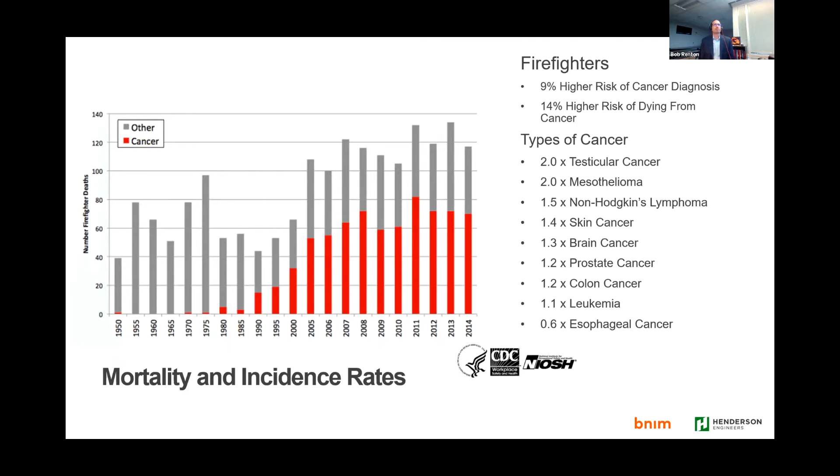So that's kind of the research we undertook, first from a theoretical, and then we went into some live burns and built different wall sections from different years, and we'll get into that in the details further.

Jeremy. Yeah, so part of what we were looking at is what are the decisions that are in front of us as an architect and an engineer every day? What are the things that we could start to look at and point to in our specifications and the way that we go about the design work that we do that could start to solve this? And so obviously the place to begin is in some of the fire code. So looking at ASTM testing, look at NFPA testing.

Both of these offer a part of the solution, but neither of them tells us anything about what happens once a building is involved in fire, and the chemical changes that happen, not just how much smoke is developed, but what is the chemistry of that smoke that both first responders running into a building are exposed to, as well as families and individuals escaping from a building are exposed to on their way out. So what we identified was that there really wasn't a test that looked at this sort of gray zone between these two.

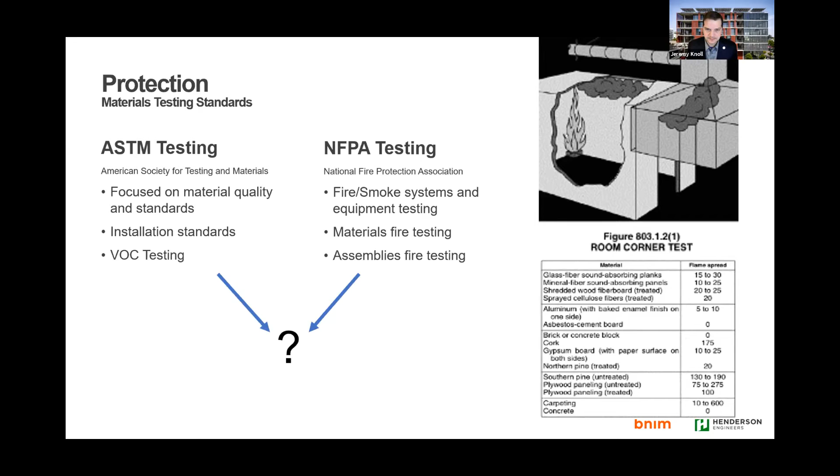And so we developed what we referred to as our Designed to Burn 1.0, which was essentially facilitating cross-industry conversations where it was an engineer, architect, firefighters, and others in the industry all talking about, like the elephant and the blind man, what's the part that each of us can see and understand, what's the part that we're touching, and how can we describe it to each other until we get a more complete picture of it.

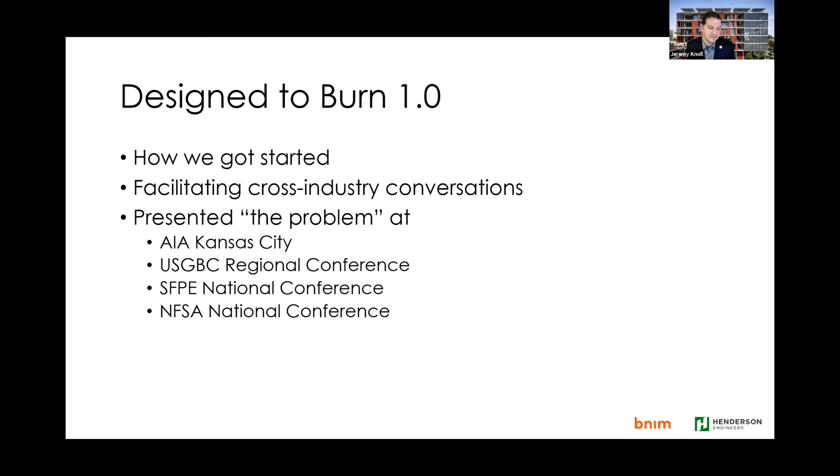And then we went about presenting essentially this problem statement to these different regional and national conferences, trying to really gather information from others about this question. What are the choices that we make every day that could impact this result of cancer incidents in first responders?

So continuing that research, the next set of questions was, well, what do the sustainability experts tell us about this? We've got all kinds of certifications out there. These are just 3 of them that seem like they should tell us quite a bit about how to deal with toxicity in the built environment and in the building envelope.

And so LEED certification gives us about 4 different credits dealing with material toxicity primarily, both in preventing toxic chemicals coming in with the building materials themselves, as well as protecting the building from new sources of pollutants like oils on the bottom of your shoes coming in from parking lots and so forth. WELL certification has several different credits or measures that could be associated with this. Similarly, reducing toxins in the basic building materials.

And then a couple that actually talk about wayfinding, because one of the things we learned from talking with firefighters is as you enter a building, if it's not a space you're familiar with, having really clear wayfinding means that you can get to where you're trying to go within the building more quickly. So there is some guidance within the WELL certification about how to set up a space that gives some logical wayfinding information.

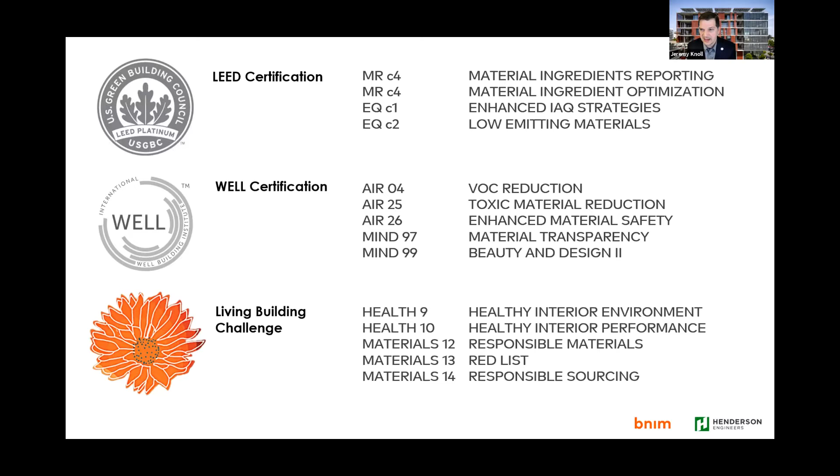And then finally, the Living Building Challenge talks again about preventing those toxic chemicals from coming into the building in the first place, and sourcing those materials in a way that is going to benefit not just the people in the building, but the people down the supply chain.

But if we look at all of these combined, what they're really doing well is they're dealing with exposure to people in the material supply chain, exposure of chemicals to people during construction, and then exposure during occupancy of the building. But none of these really address or even begin to talk about what happens in an emergency, how the building changes during that moment.

And I've worked on a number of K through 12 schools, and this was something that became pretty important, as one I completed a few years ago here had an electrical fire in a vault outside of the school on city property, but it dumped a bunch of smoke into the building. And so it was the better part of a week before they were able to safely reoccupy that space, using all kinds of filtration and air testing before they could get back in.

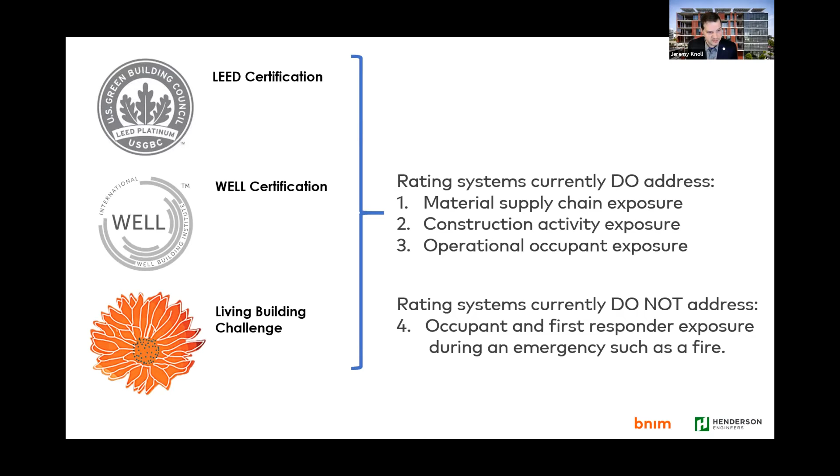So it's not just about protecting people while the building is in operation, but thinking about what happens in an emergency like that and how do we continue to protect people. So another thing that the Living Building Challenge gave us, as I'm sure many of you know, is the concept, or at least an industry standard, for what we call the red list, or the list of chemicals that are known to have harmful effects on both human physiology as well as the ecology in the spaces around us.

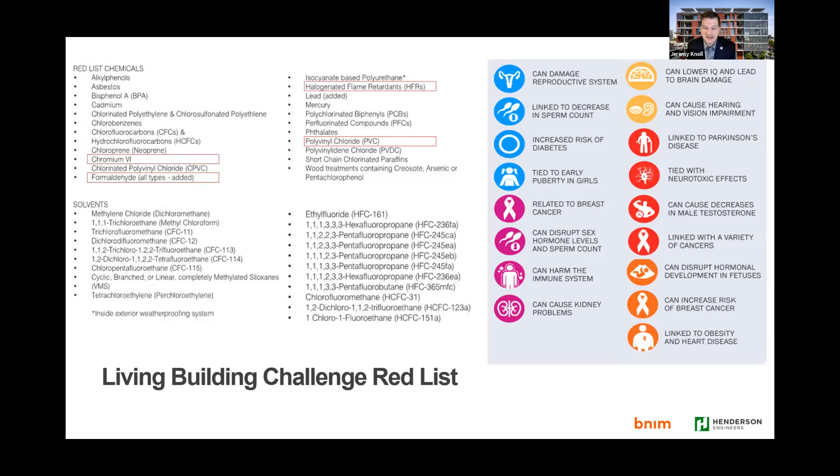We highlighted 4 chemicals in particular here at the top that are especially difficult to remove from buildings: chromium-6, formaldehyde, halogenated flame retardants, and polyvinyl chloride, or PVC. And on the right, you can see just some of the impacts of incorporating these chemicals into our buildings. And this seems like an easy thing to say, okay, we're just not going to use red list chemicals. But when you start to look at even just the building products and the furnishings that we put into our homes, we find these chemicals really everywhere.

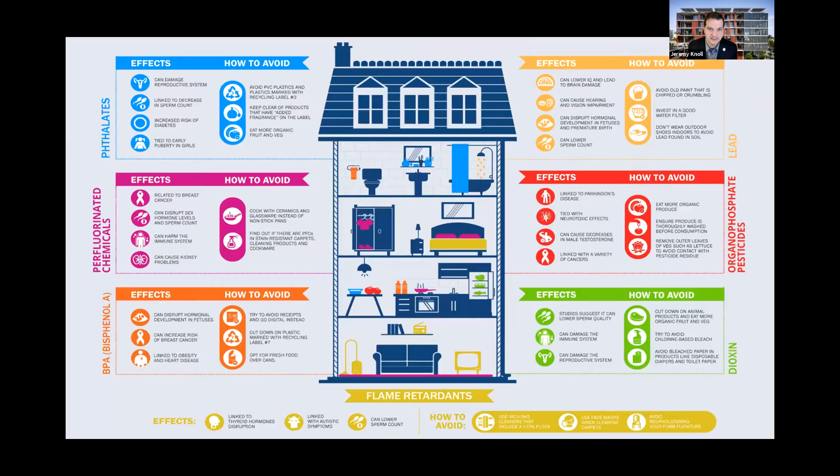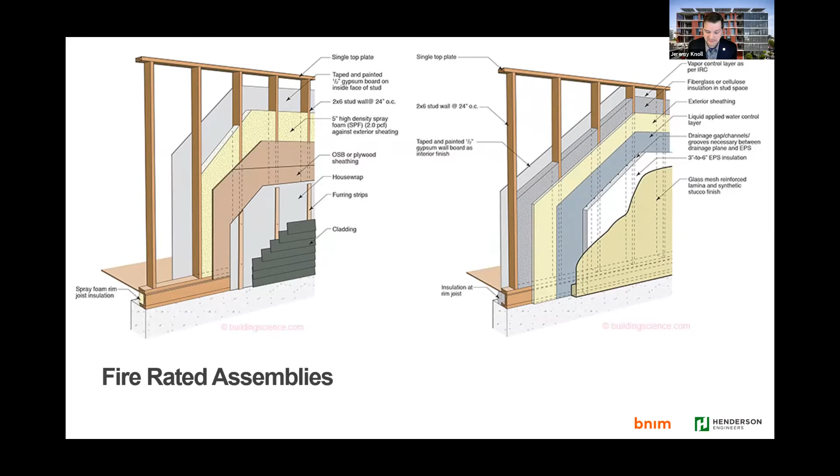So what are the steps that we can start to take now to understand what we can do about these different outcomes, and how can we prevent them from coming into the building? And so, as Bob mentioned, this is where we started thinking about the idea that maybe there's some fundamental parts and pieces to the way that we're building our buildings that could change, and what are the decisions that we could make about how we go about designing something like the exterior wall section that could begin to both give us some protection, but also passively remove these chemicals and materials that we know might chemically combine during a fire to create a toxic substance that doesn't exist in their inert form.

So that led us to many discussions. We spoke in different parts of the country and at different conferences, and it got us to more discussions with UL, with Factory Mutual, with USGBC, firefighters, lots of cancer research institutes and resources out there. And we realized that we needed to go for some applied research and to be able to test our theories and see if we could find some correlations.

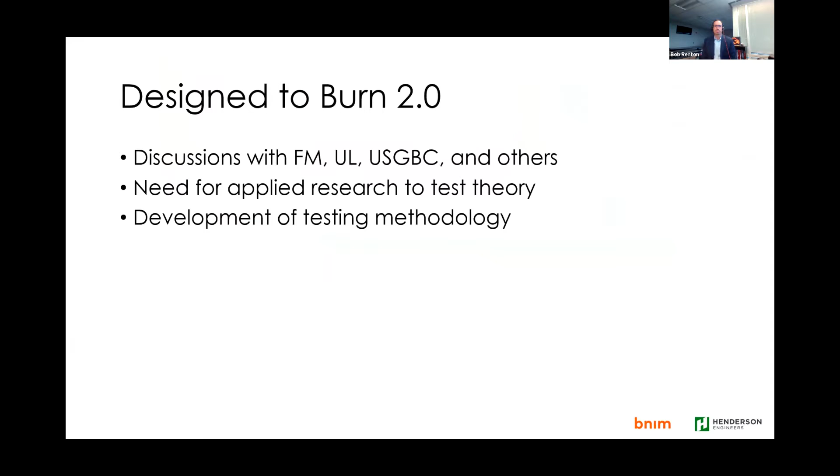So we decided that the best way to do that would be to build wall assemblies, or compartments at the time. So we ended up trying to wrap our heads around what we could do, and we looked for calorimetry, and we ended up at Oklahoma State University. We knew that we could get some use of a calorimeter there. So then we essentially put together a team.

Henderson Engineers sponsored research with Oklahoma State University, and BNIM and Jeremy and Armstrong Forensic Labs, and then Turner Construction. We all came together and put our heads together, and we knew what we needed to do as far as the different decades of construction, legacy through modern, and we tried to micro analyze what we could.

There's so many things to examine, so many things to look at. So we boiled it down to, we wanted to look at heat release rate and some fire dynamics, but we also wanted to get a lot of products of combustion and be able to analyze what's coming out of these different wall components. So we ended up, like I said, we sponsored a capstone project with the seniors at Oklahoma State University and their fire protection and safety engineering technology program.

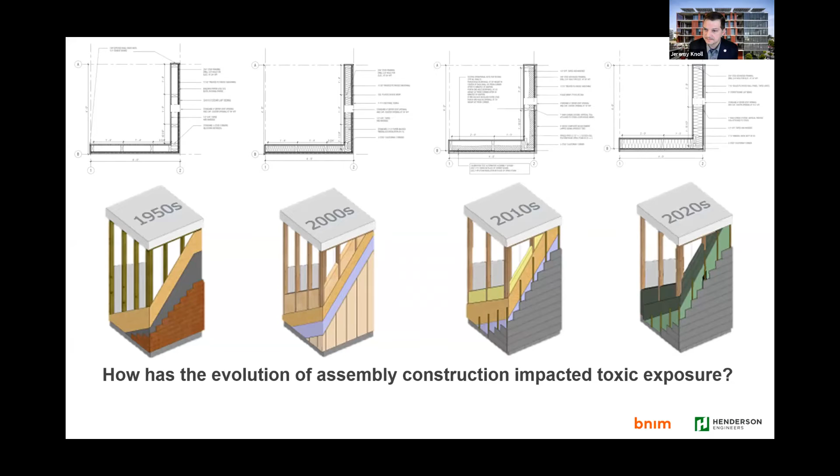So we weren't talking about a big change in cost or assembly, but something that could potentially, within reason, become a more standard building material type. And so then we worked with Turner Construction on actually building these wall corners. Initially, the students were going to build it, and Bob and I both shut that down pretty quickly.

These were students who had no real construction background, and we knew that we would get inconsistent assembly details and work. So we wanted a professional who builds homes over different time periods to do this for us. So they built it in a warehouse as a training exercise for some of their guys and gals, and then these were shipped down to the burn lab in Oklahoma.

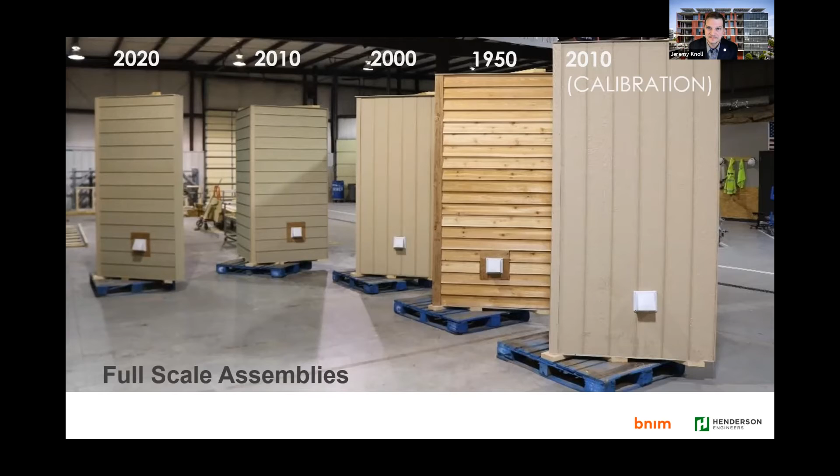And we kept pretty exacting details on how they were constructed and the materials, because we sensed that we want to reproduce and be able to test on multiple different revolutions the same cells and the same products, obviously. So thank you, Jeremy.

So then it became an idea of what are we going to sample for? Like I said, we knew that fire dynamics and heat release rate and some mass loss would be pretty simple, but getting into the details of the acids and the polynuclear aromatic hydrocarbons, the heavy metals that would be produced, the SVOCs, VOCs. So this was a collegiate project, obviously, and our budget wasn't unlimited, and our burn cell and our calorimeter was such.

So we tried to maximize the most likely products that we would see in residential construction and fires, and what would be the most valuable for our study, and also what we could afford, because we could spend thousands and thousands of dollars analyzing the different components. So this chart breaks down the big components we were looking for and testing for, and then mostly the students, with some direction from Armstrong Labs, built the sample trains, and that's what you see there.

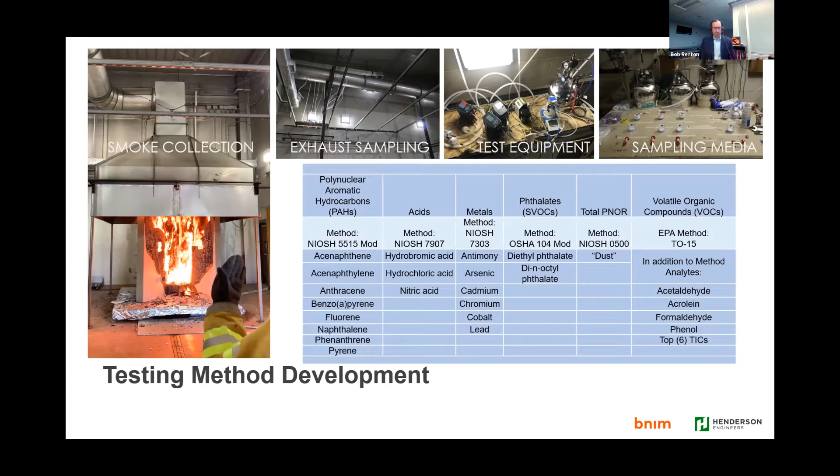We did 5 burns over 3 different sessions down in Stillwater, Oklahoma, and then sent the materials in 3 separate samples back to Armstrong, and tried to perfect along the way our testing and monitoring of the samples. So next slide. This was a collegiate effort and wasn't totally in the private sector, so there were some limitations, and we're aware of that, learning from those, and continually strive to do more testing. We recognize there's really no standard testing or sampling process for what we were looking for. So we put our heads together as a team and came up with what and how we were going to sample.

Limited resources as far as experience and equipment. The sample stream, this is the first time it had been done at Oklahoma State. So we had some issues with condensation and some heat up in our ductwork that diluted some of our samples a little bit. Stoichiometric ventilation in the fire. Obviously in a calorimeter, ventilation's pretty much unlimited. We realized that in a real room or compartment fire, you have incomplete combustion and limited ventilation, so you sometimes have more products of combustion, more smoke. It's not nearly as complete a combustion.

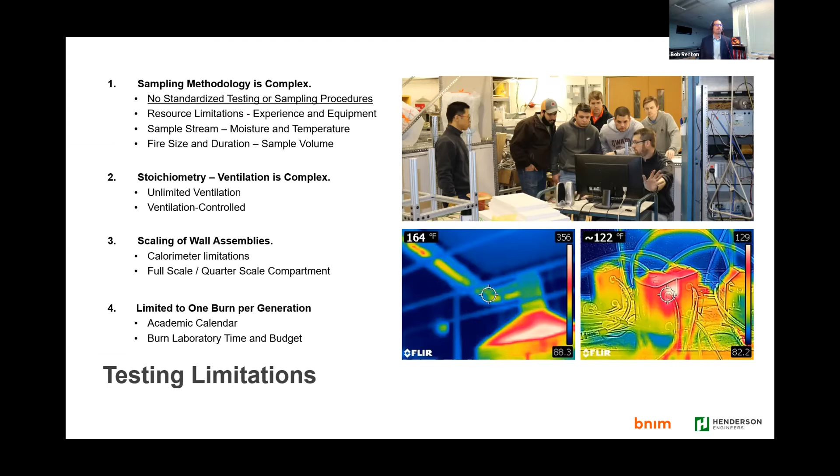We would have loved to do a full compartment. The calorimeter limited that, so we came back to our 4x8 corner. And we wanted to do multiple burns for the same generation to make sure all our data aligned and was accurate. But with budget, laboratory time and the academic calendar, we ran one burn of each cell. So those were our limitations. But with anything, you have to limit where you're at and what you can do.

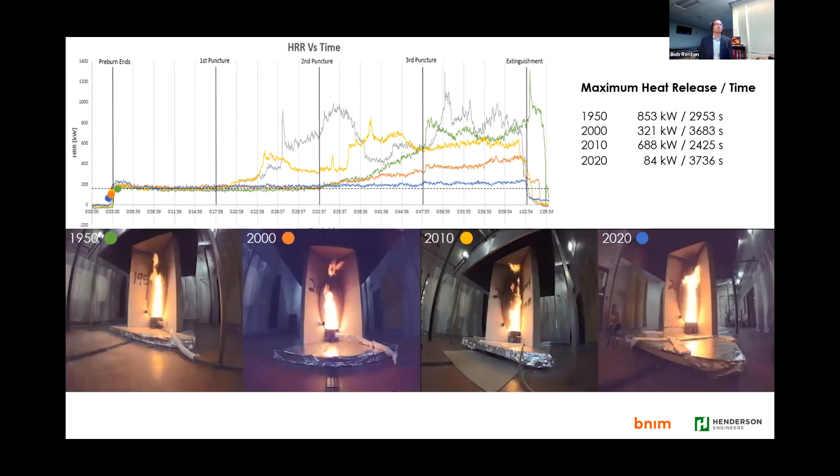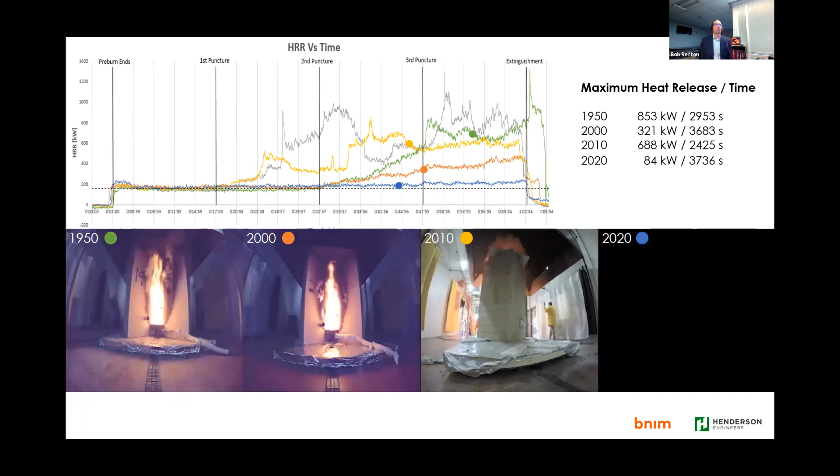So we did 4 burns. There's 4 different cells. From left to right is the 1950, 2000, 2010, and 2020. And I should say we punctured the wall every 15 minutes. We did every burn for an hour, and every 15 minutes we would make a controlled puncture in the wall to make sure we got heat and fire into the wall assembly. So you can see the first puncture, second puncture, third puncture. Those are 15-minute increments, and the last is the extinguishment.

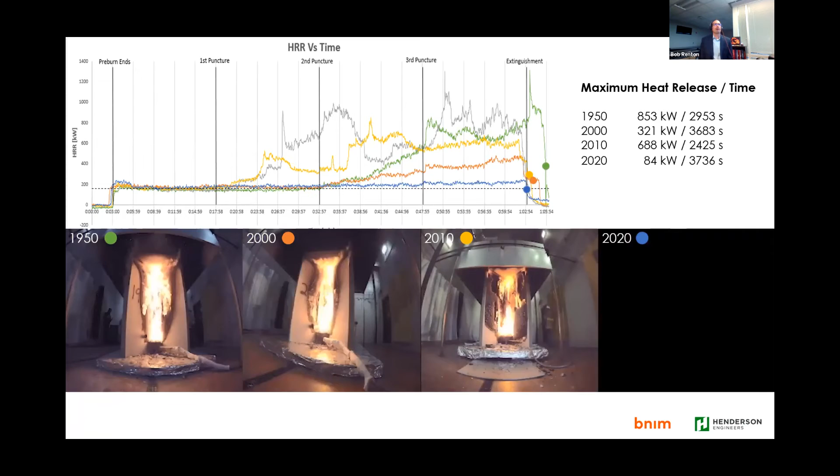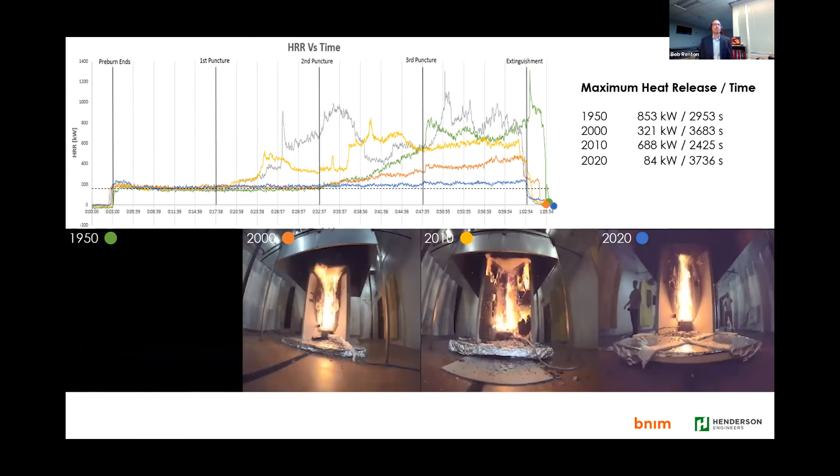And our biggest heat release rate ended up being the 1950s. We had the most consumption of that cell, and the lowest heat release rate was in the 2020s, and we'll go into better detail about that, but very little of that cell burned because of the construction means and methods. So we could spend all day looking at the heat release rates and analyzing that. It could be its own presentation.

We also looked at carbon monoxide and carbon dioxide production. And again, the blue line is the 2020s, and it's pretty baseline. But the green, which was the 1950s, and then the 2010, we had some really interesting peaks for CO and CO2 production.

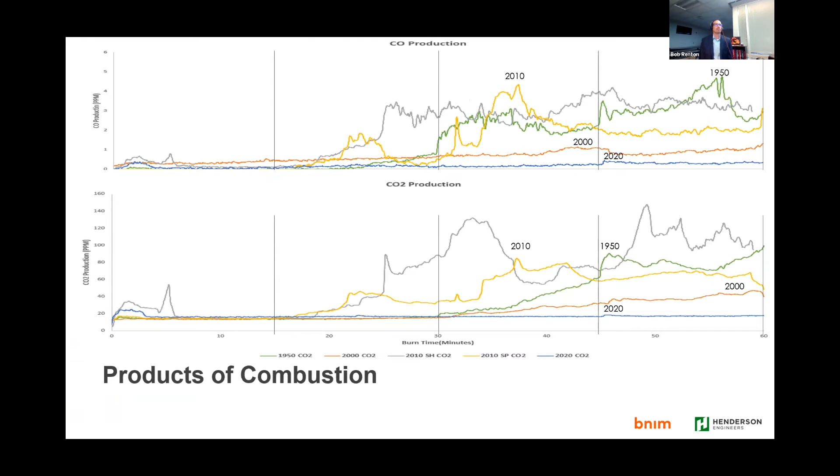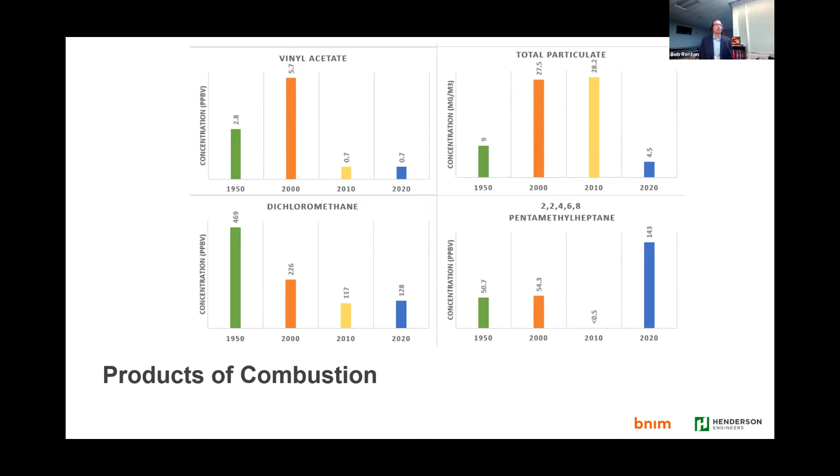And then this is just one snapshot of the analysis that we got back from the sample trains and the analysis from Armstrong Labs, but just the different components and different byproducts that came out of the burns. And again, it's color coded for each era of the burn cell. So green is 1950s, orange is 2000s, yellow is the 2010s, and then blue is 2020. So we have lots of good data from that as far as products of combustion and the different chemicals that are offset from each of the wall cells.

So we're briefly going to run through each of the burns. I realize we're coming up closer to time here, so we'll try to get through these. I've already described how the walls were assembled, but now you can see on the bottom left, these are the measures that we tried to put each of the wall burns to understand what the different characteristics were. So looking at installed cost, what did it cost essentially per square foot to build this? What's the energy performance of it, R value, and how it would perform in the real world? What's the installed toxicity? In other words, what is a construction worker exposed to as they're installing this assembly?

What's the heat release rate? How much heat is it releasing over that burn? What are the products of combustion? So what all in that assembly actually is able to be burned? And then how toxic is the smoke based on our measurement?

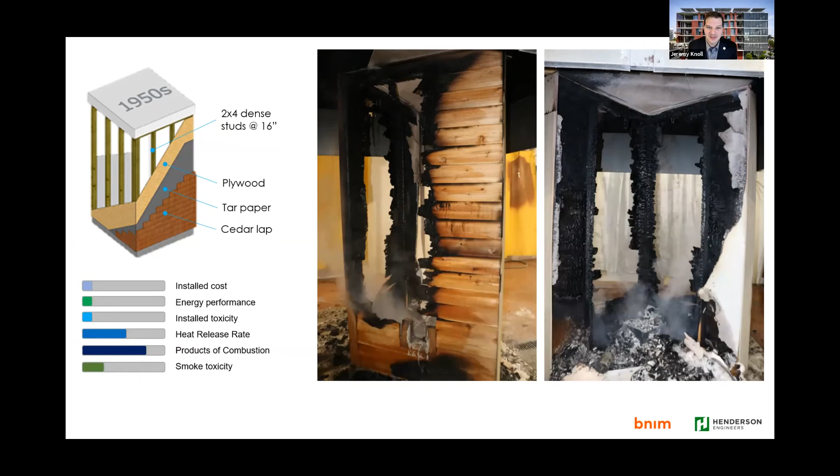So I will say that the 1950s burn was the most like being around a campfire of all of these. It did eventually start to burn hotter and hotter, but definitely it was cedar. It had a nice smell to it, and was ultimately a burn that you could mostly be in the room with. Whereas later, when we talk about the 2010s, we essentially had to get out of that space because it got so hot at different points. The lumber that went into this wall assembly was from a barn in the 1940s, so it was nice, dense lumber that held up really well in the fire, but obviously the cedar lap siding was almost totally consumed.

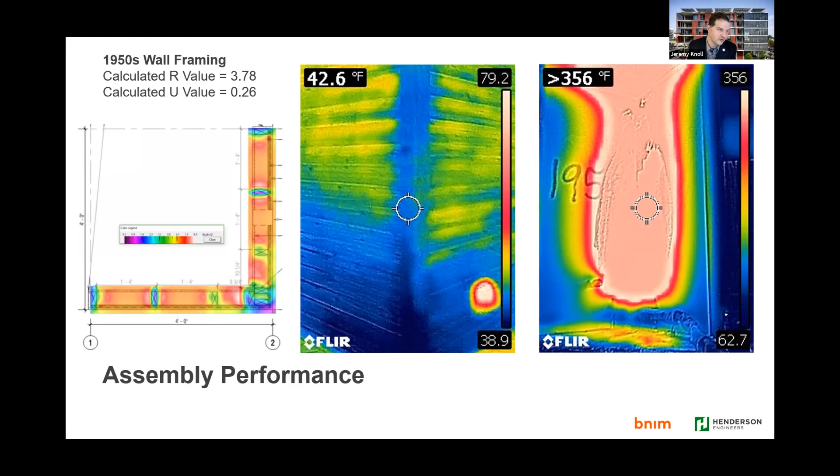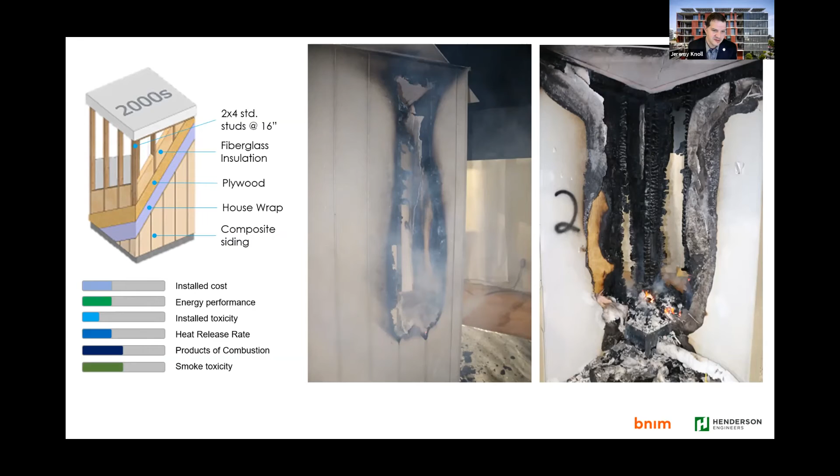The heat release rate is a little bit lower here because we are protecting portions of the combustible materials. The products of combustion do go up though, and the smoke toxicity does as well. Anything to add on this one? Yeah, we had a little less consumption here. The fiberglass insulation protected some of the wall space, and the oxygen interface within the wall was a little more reduced. So we didn't have near as much consumption as we did in the prior cell. But go ahead, Jeremy.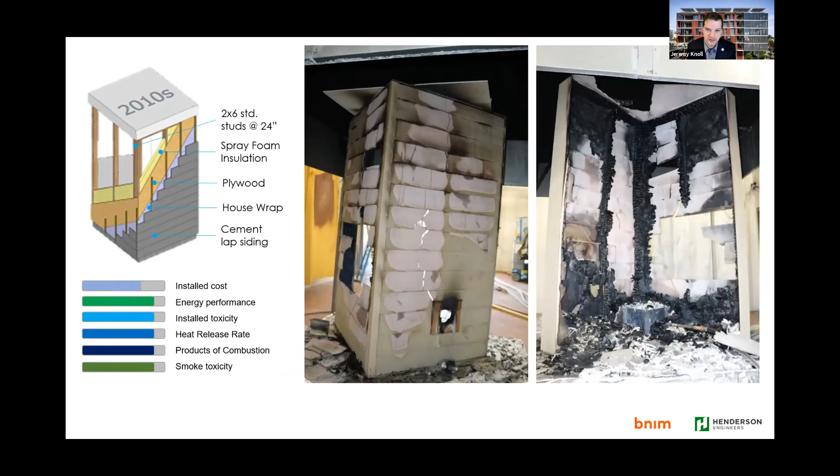Go ahead, Jeremy. Yep. And so finally, the 2020s wall, which was packed with mineral wool in the wall assembly, you can actually put your hand on the outside of this assembly during the burn and not feel the heat coming through it. It was cool to the touch on the other side from the fire. Energy performance similar to the other one. Installed toxicity much lower. There were really very few to no Red List chemicals at all in this assembly.

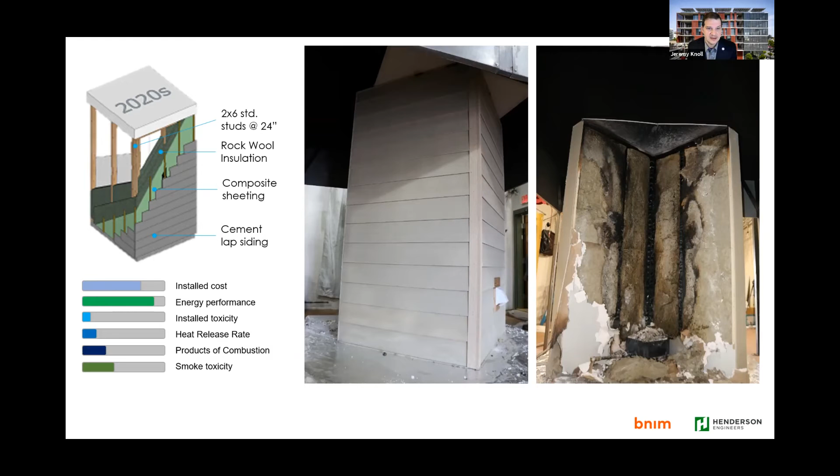And then frankly, it was hard to get it to burn. And for what burn we did achieve, it only burned away about 1.5 inches of the studs. So when we were done, we actually pulled the batt out and the wall was still structurally intact, at least as we would expect it to be able to escape the building. Yeah, the heat and the smoke, there just wasn't much room in the wall cavity to have that smoke-heat interface and have combustion occur. So just like Jeremy says, the first inch and a half of the wall stud was all that was charred.

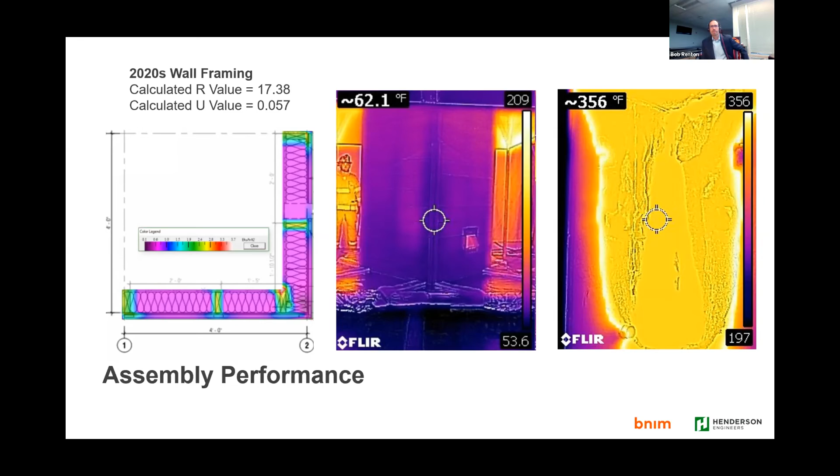So finally, as we looked at each of these, what was our sort of score for each of these, and what did we see? So installed cost, we see the 2010s and 2020s being pretty similar. Energy performance, the 2020 was actually a little bit better because we filled that entire cavity and had some continuous insulation on the outside. Installed toxicity, the 2010 was just off the charts for that, as well as the heat release rate, because the foam insulation in there was essentially like a frozen gasoline. So once fire got to it, it went quick, and like I said, was pretty unbearable to be in the room with that burn.

But our focus today though is on this energy performance and installed toxicity, and so as you can see, those are the pieces where we can start to see the relationship as we tighten an envelope and allow air to move less and smoke to get out of the space. We see some big impacts here, but I think there are solutions going forward that offer us a way to be both energy efficient and to reduce that toxicity and exposure to residents.

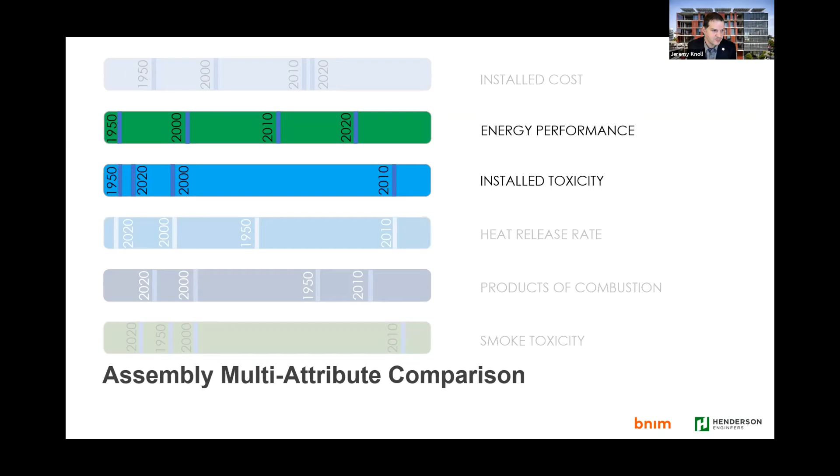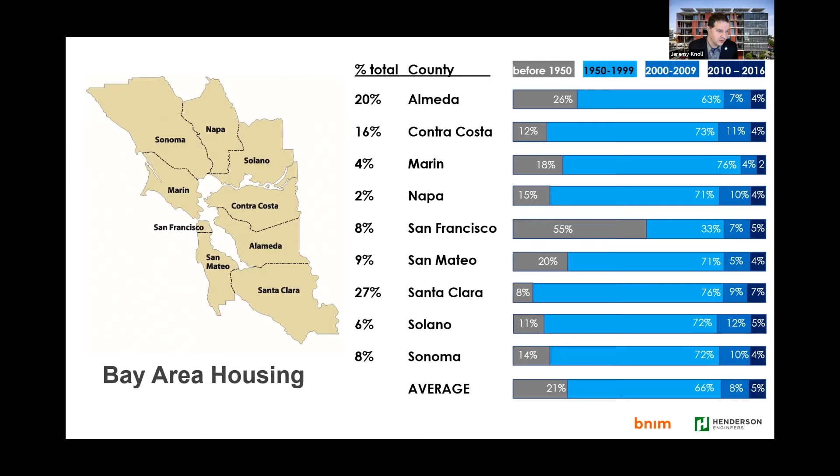So next steps, setting a replicable standard. That's really what Bob and I are up to now, trying to grow this conversation. Here we are talking to you today about this. We want to refine the test methodology. We've got some good proof of concept here in our testing, and then beginning to work with LEED, WELL, and Living Building Challenge to address this gap in the systems and develop a pilot credit or an innovation credit approach so that we can create a replicable way for others in the industry to address this.

And we seem to think that the wildland interface code and a lot of what's going on in your counties is of interest. The hardening of the different products that are utilized in your jurisdictions seems to correlate to some of what we've seen as far as the products of combustion and things being a little safer. And then I think there's also a good conversation here for sprinklers. I know most of your fires are coming from the exterior of the wall assembly rather than ours from the inside, but bottom line is it's burning and it's still off-gassing and producing products of combustion that are harmful.

Sprinklers, both inside and outside, are essentially green. They're going to limit the size of the fire, which is going to reduce exposure for firefighters and occupants. And hopefully it's going to keep the products of combustion out of our ozone and help limit some of the global warming and some of the impact to our climate.